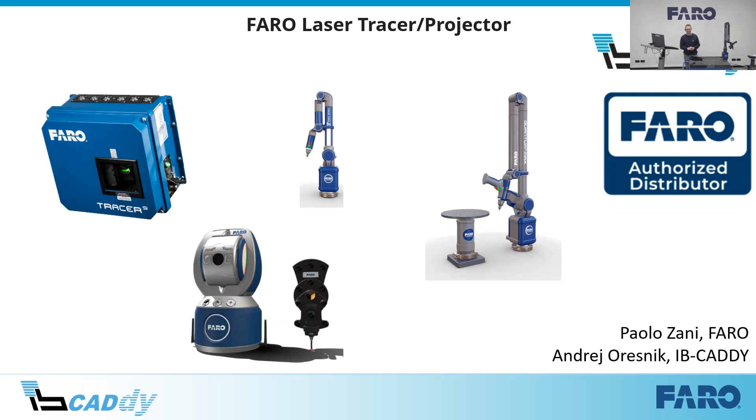I will make a short presentation about our company and our solutions in the field of FARO supplier. IB-CADDY company was started in 1991. We have three locations, two in Slovenia, in Ljubljana and Kamnik, and one office in Belgrade. Our company has a lot of knowledge in different fields of industry, like mechanical design, electrical design, manufacturing, and so on.

We have more solutions for what we can offer in our market with SolidWorks and all connected software to SolidWorks and 3D experience, like CAM, Solid Steel, and so on.

We also have different technologies in 3D printers, so we can print with different materials like carbon fiber, Kevlar, some metal parts, and so on. But today we will speak a little bit more about the FARO solution.

We are authorized reseller for FARO solutions in Slovenia, Croatia, Bosnia and Herzegovina, Serbia, Montenegro, and North Macedonia. FARO is divided into different fields, like 3D manufacturing, metrology, 3D design, reverse engineering, construction, BIM, and also public safety and forensics.

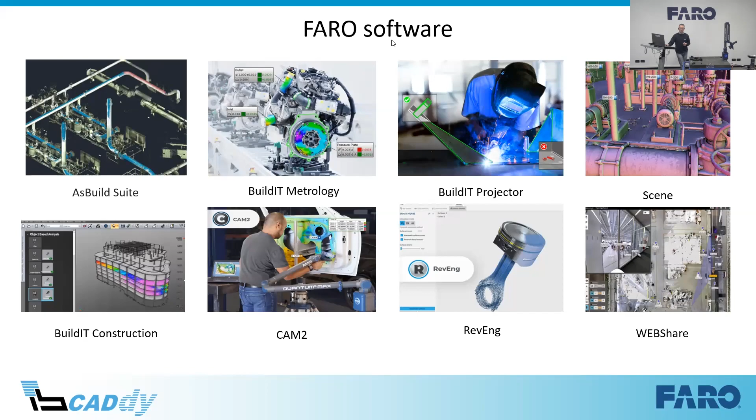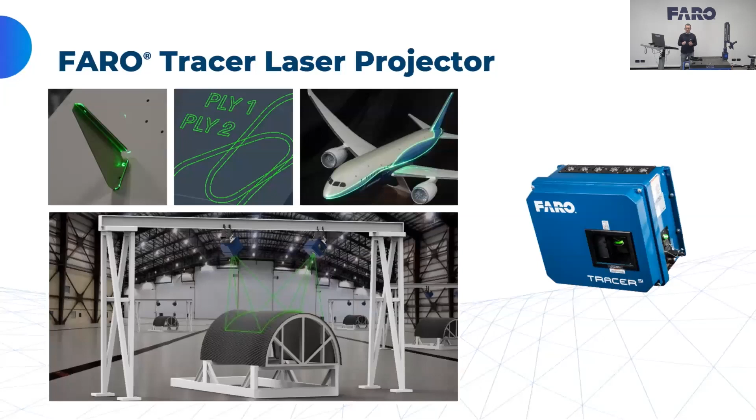FARO Tracer projector is a laser projector, really flexible. As you can see in this slide, we can project on mechanical parts, assemblies, ply stratification for carbon fiber or composite applications, and really wide projection on really big objects like an aircraft or a satellite part like this one.

How does it work? What is the FARO Tracer and how does it work? First of all, it is a beam laser projector. Thanks to two turning mirrors, it is able to spread a three-dimensional laser image on the surface of your part, in order to project sequences, locate parts, and find positions, aligning parts, sub-assemblies, and models.

Last but not least, the FARO Tracer SI is able to scan your part and, without any operator intervention, determine if it's okay, in the correct position, missing, or not missing.

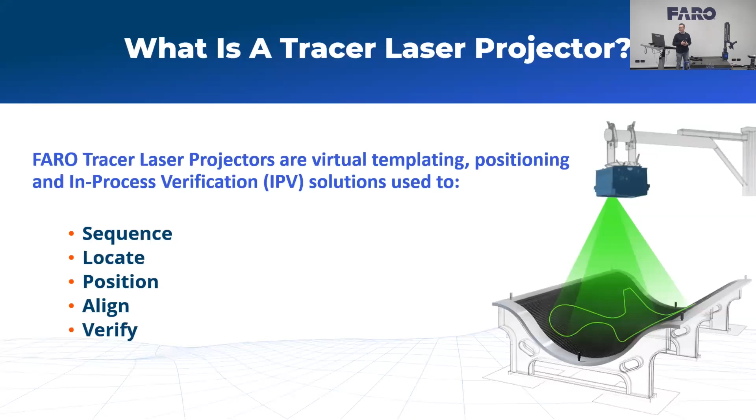The benefits: first of all, improve the quality. Imagine that right now you have different physical templates, which could be wide or small, but the common point of all physical templates is that the company is spending money to manage them, to take care of them, and to calibrate them.

With a virtual template, you are able to increase quality because you can adjust the projection according to your projects, and you save money because you can scrap all your old physical templates. This way, we can reduce scrap connected to human errors or assembly problems, and cut that dramatically. We can cut the rework time. In a few words, this solution is able to reduce costs and optimize labor costs.

Usually, when we are talking about manual processing of a workflow or an assembly, there is usually a problem.

Really high level and skilled operators are facing an overload, while new hired operators are not used so much. With the correct workflow and guiding correctly the different operators, we are able to guide all operators in the same way. This means uniform production and balancing the workload on different operators.

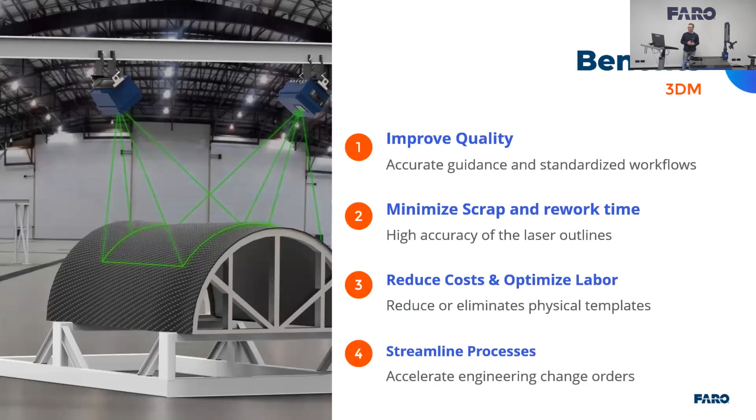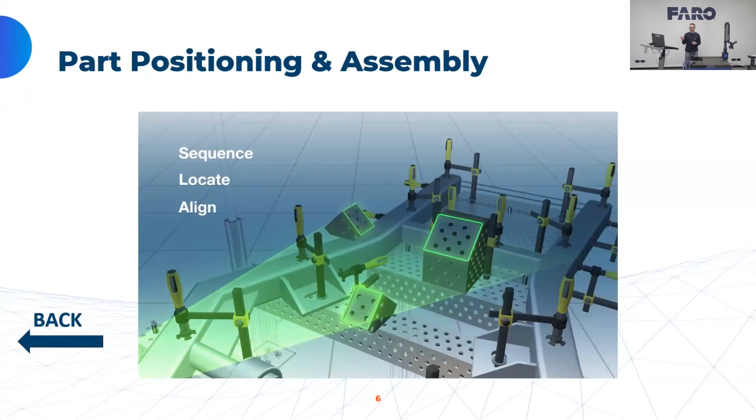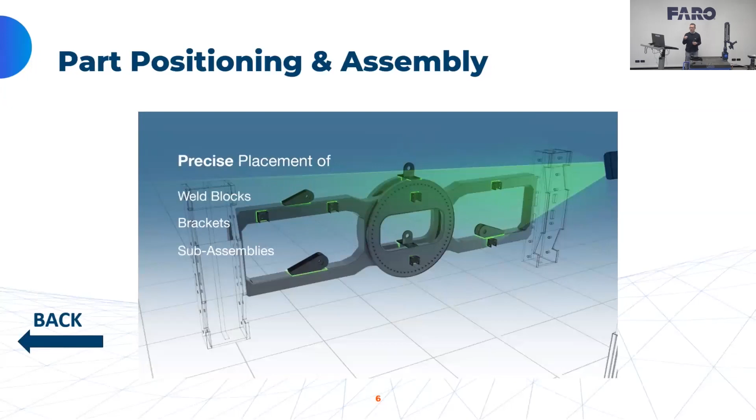Let's take a look at some examples. Here we have a video showing the assembly of a frame. This is a heavy equipment part. Another heavy equipment part, where I'm projecting the placeholders for the different parts to mount and weld.

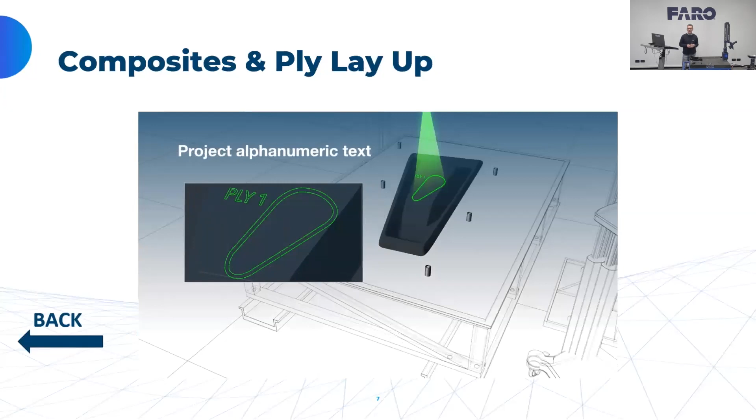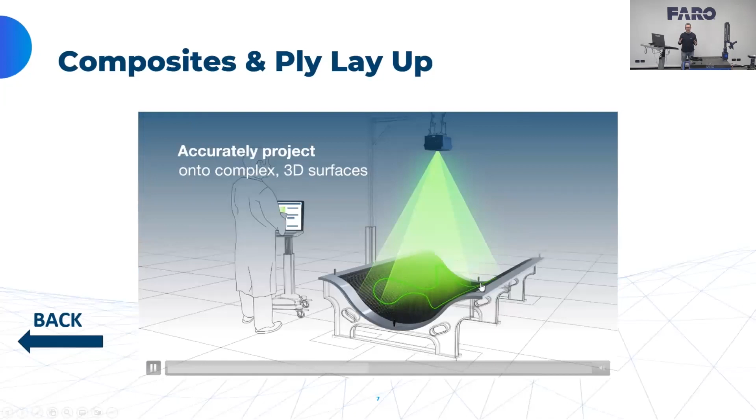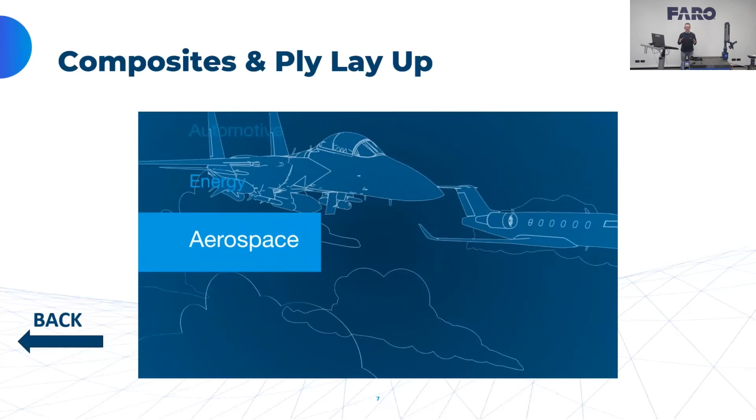The FARO Tracer is also a good idea if you want to create the virtual template for carbon fiber stratification and composite industry. Usually one of the problems is finding the correct location of the mold. The tracer can find this location and adjust it in function of the movement of the operator, and is able to check it automatically in order to always have the correct position of the mold.

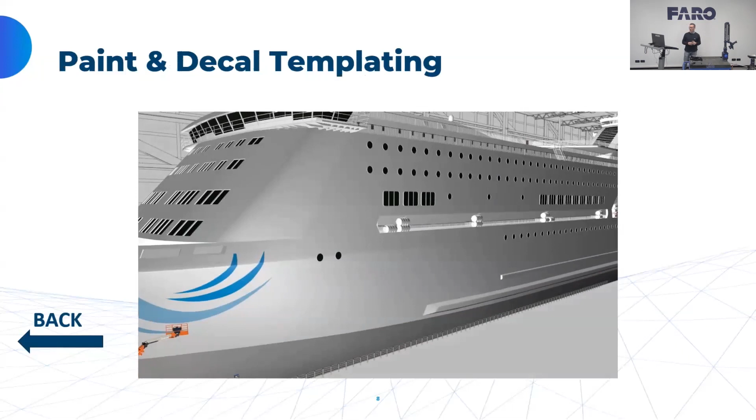When the object is really wide, like an aircraft, a cruise ship, or a commercial ship, we are able to connect different tracers and create an array of tracers in order to project really wide. Everything is synchronized, so in the exact position where the projection of the first tracer finishes, the projection of the second tracer starts.

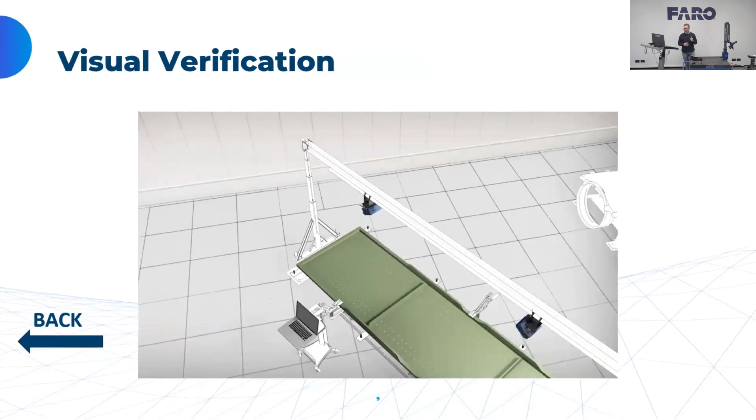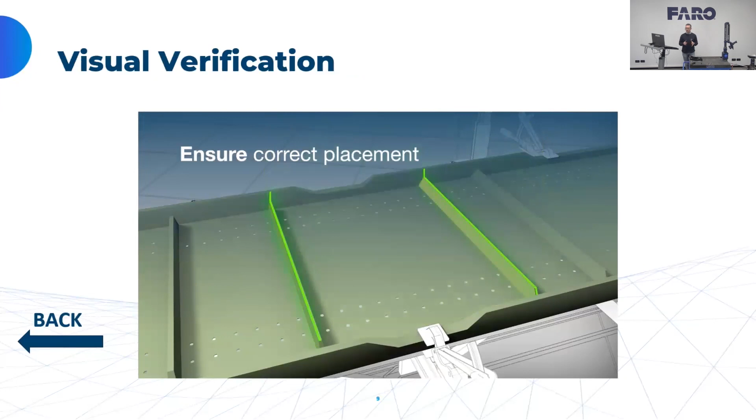And last but not least, the possibility to guide the operator in order to check visually the position. But remember that Tracer SI is able to scan and finally say if, for example, these holes are in the correct position or not.

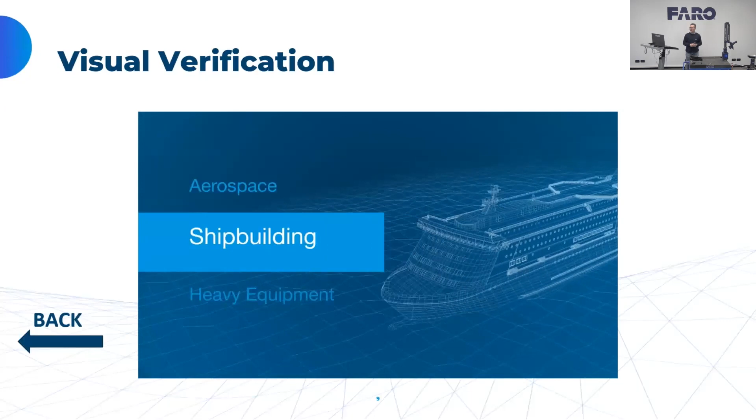About the specifications, the range of projection starts from 2 meters up to 15 meters, so we are really flexible. You can always find a position where the tracer is projecting. It is a device with high accuracy - we are talking about 0.25 millimeters at a distance of projection of 4.5 to 4.6 meters.

Is it complicated to find the position of the mold, the position of the assembly? No, it's not rocket science. There are some reflectors, and the Tracer M is able to scan these reflectors and find the correct position.

The virtual templating is based on a 3D CAD model. This means it's enough to load your CAD, click what you want to project, and the tracer will start projecting. The only difference between Tracer SI and Tracer M is the possibility to scan. Thanks to this, Tracer SI is able to scan holes, scan corners of your models, scan checkerboards in your environment, and align without reflectors.

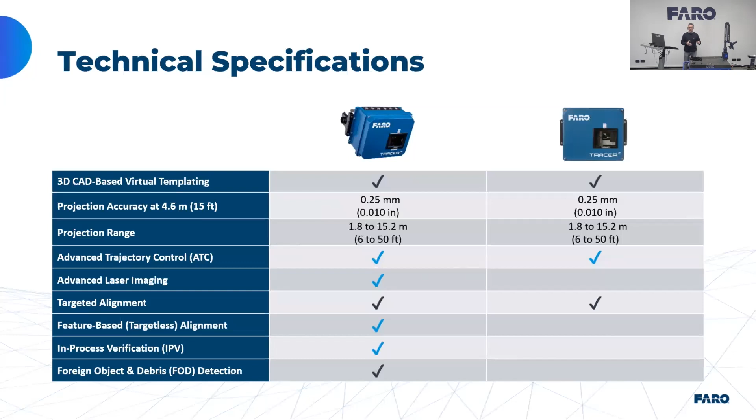And thanks to the capability of scanning, the Tracer SI is able to check if a component is in the correct position or not, independently from the operator.

How to fit the tracer in my environment? We have different possibilities. First of all, the tracer is equipped to provide the power supply - it's enough to provide a cable like this one, a standard cable common in desktops, computers and laptops, and an Ethernet cable. We are not talking about gigabit Ethernet, we are talking about fast Ethernet. So two requirements that are not so hard to provide.

When we have to mount the tracer directly on a column or a beam, we can provide this frame - it's called the 3-axis mount, and it's possible to mount this equipment directly on a pole, a cylinder of 100 millimeters of diameter.

In case you want to mount the tracer directly on the ceiling of your facility, there's the beam mount. Thanks to the beam mount, you can mount your tracer directly on a ceiling and orientate it manually. If you want to create your own mounting system, it's not a problem - we are the manufacturer of this technology, so we can provide the different positions of the holes in order to fit perfectly this device with the design of your facility.

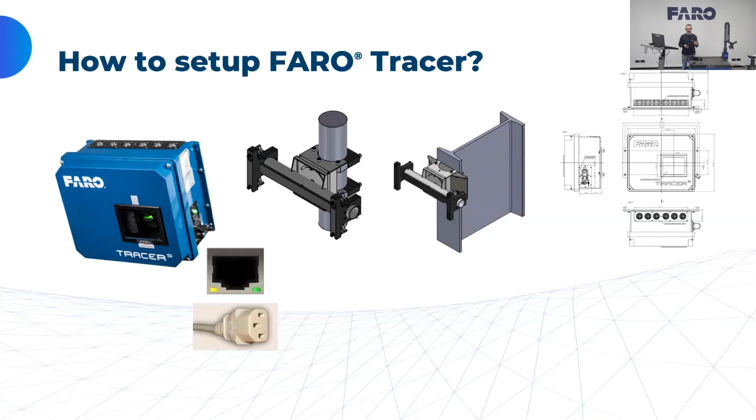The FARO Tracer is quite passive, it's projecting nothing else. What is the clever side of this solution? The clever side of this solution is the software.

This software is available with 3 different interfaces: Planner, the most complete interface for the operator and planner who should physically create the different programs; Instant Projection; and Operator. Operator is the typical user of the tracer, who thanks to a remote control, is able to control the tracer without any computer or keyboard close to them.

It's enough a remote control for moving the projection. But there are small companies where the planner is at the same time the operator. In this case, we can use instant projection, which is an interface optimized for pick with the mouse and project with the projector.

All these three interfaces are really simple to use. It's possible to do in-process verification, asking the operator to check if the position is okay, or asking the tracer to scan and verify if the position is okay. I can provide different levels of instructions, starting from the projection of the text directly on the surface of the part, and finishing with on-screen instruction using text and images.

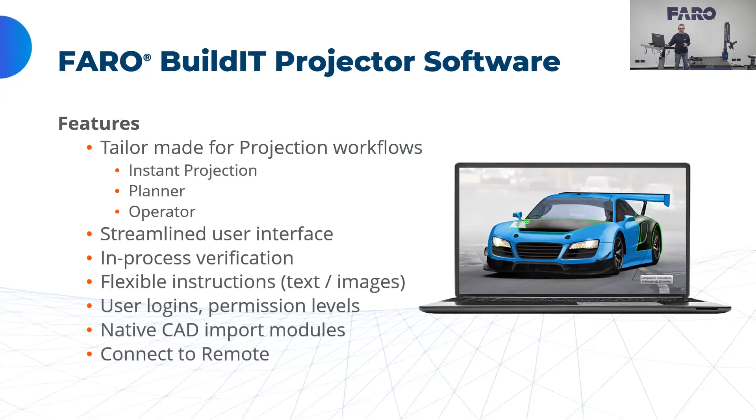Okay, let's go on and take a look at the FARO Tracer. Now I block my camera in Spotlight. If you have some questions, please feel free to ask, there is the chat for this.

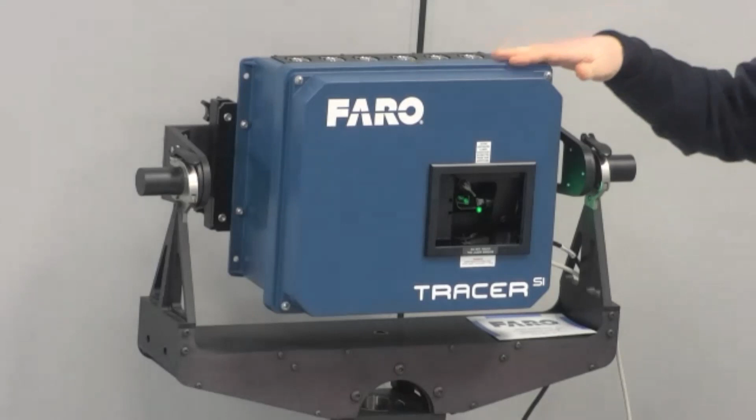Okay, this is the tracer. As you can see, it's a really regular shape, 40 centimeters long, the depth is roughly 20 centimeters, and 30 centimeters high. Here we can see the yoke mount, a system for mounting this projector directly on a standard tripod, a FARO standard tripod.

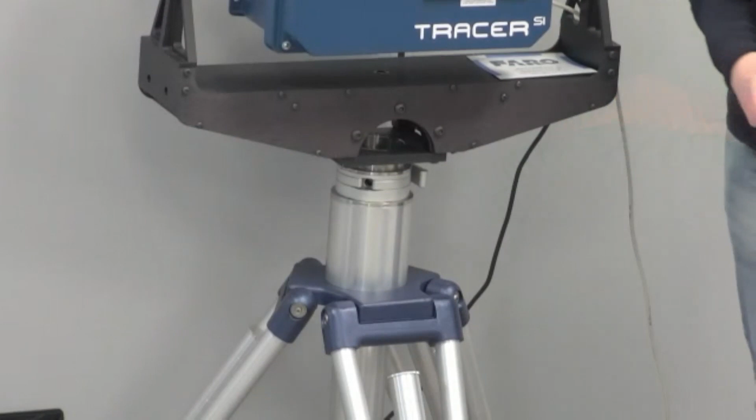In order to connect the power source and the Ethernet, can you see that here there are two cables? One is the Ethernet, the other one is the power plug. This equipment is protected against dust with sealing. Here there is a protection glass that is protecting the laser, an array of fans that is extracting the heat from the inside, and here a filter for protecting the whole equipment from the dust.

And here, as you can see, it's possible to orientate the laser projection in two directions thanks to this yoke mount. What is projecting in this moment the FARO Tracer? As you can see, it's projecting here.

Okay, I'm on the other side of the room. Here, as you can see, the tracer is projecting. What is the clever part that is projecting? The software. Now I'm going to share with you directly the software projection.

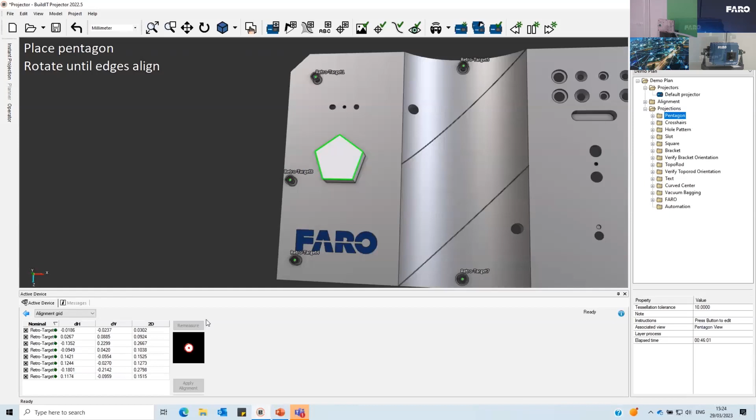I share with you again my screen. Now I recommend you use a view option and use split view in order to see my software on the left side of the presentation and my camera on the right side. Okay, let's imagine that I'm the operator.

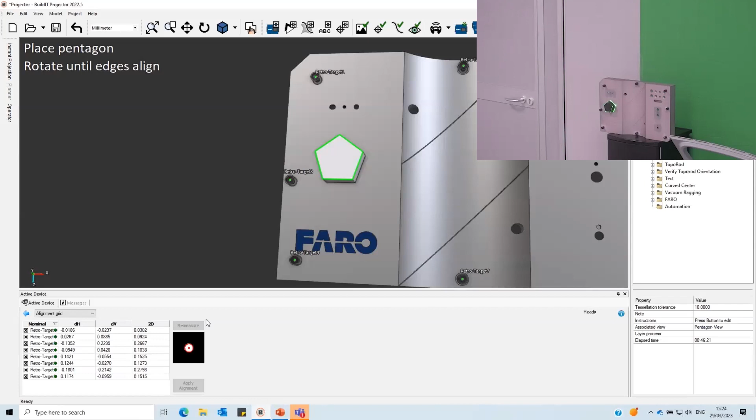In this moment, can you see that my software is projecting a pentagon, and there is the note: rotate the pentagon until the edges are correct. Can you see that this is the projection? And can you see that the projection is really precise, 0.25 millimeters of accuracy?

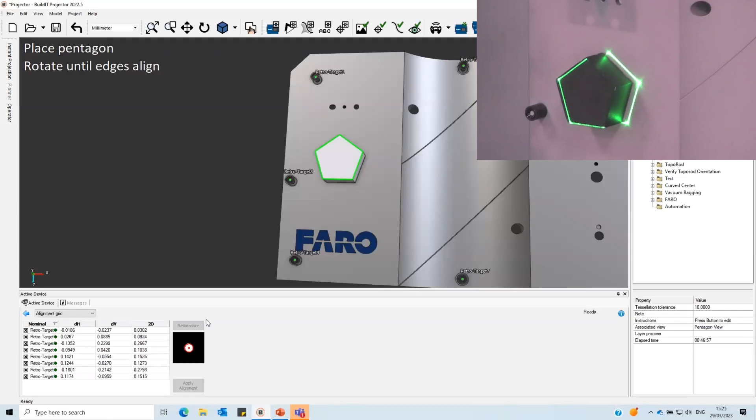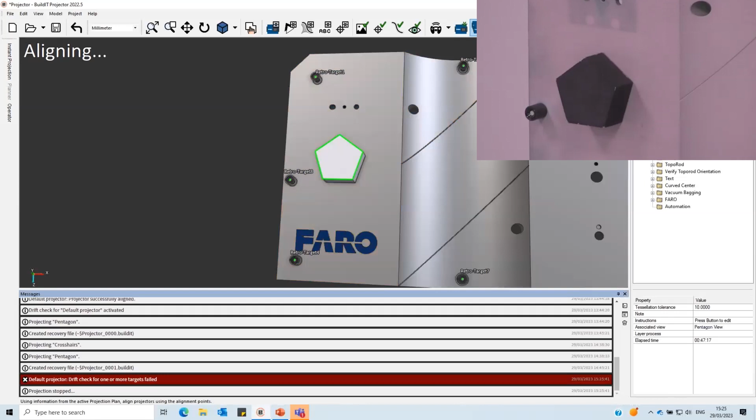If I need to move my part, can you see that if I move the part a bit, now the projection is not aligned. But just a click with the mouse or with the remote control, and I can perform the drift check. Now the software is aligning again all the points, the reference points, and is starting projecting again. A few seconds for detecting the different targets, and finally the software will start projecting again.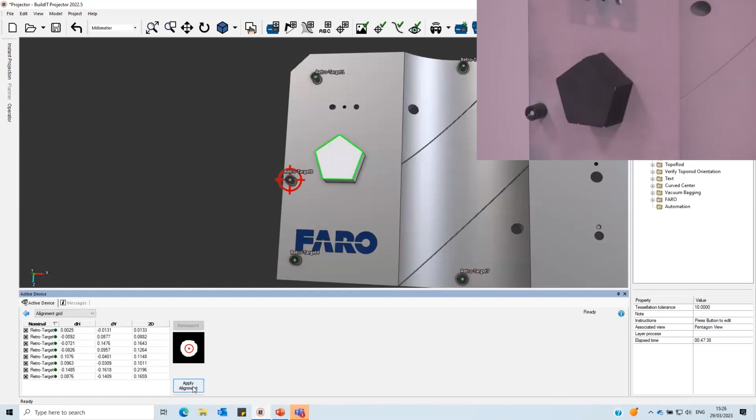Here we can see the alignment. The alignment could be automatic or manual. And can you see that I moved my part, but the tracer is able to find this position again.

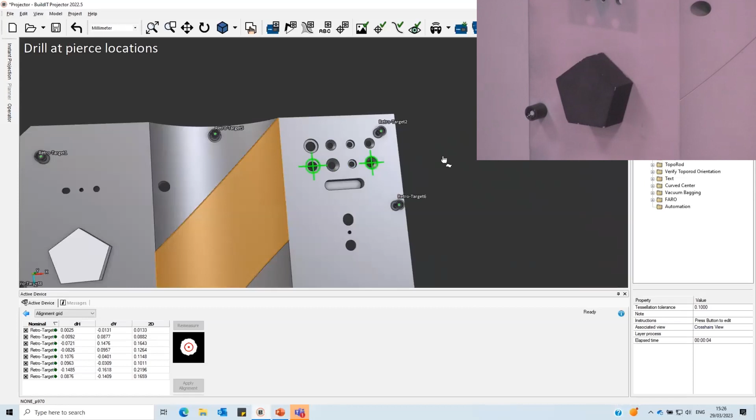Okay, let's go on. Clicking the button of the mouse here, I can advance with one step. Now the software is projecting two placeholders for drill holes. Going on, always with the mouse, I can check these holes, so I can ask the operator to check these holes and say if the hole is correct. I can project different holes at the same time, or different features at the same time, but of course I can enter my tree of features and go on and check one by one all the features.

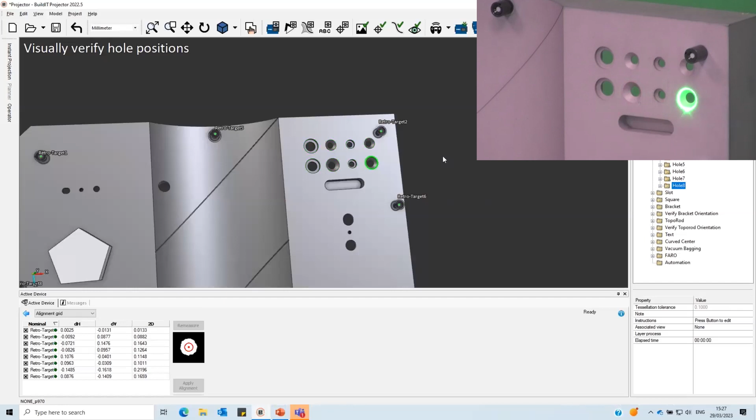One of the typical problems of the laser is the possibility to project on reflective materials or completely black materials. In this case, I'm using a carbon fiber part. Can you see that the projection on completely black parts or really reflective parts is possible.

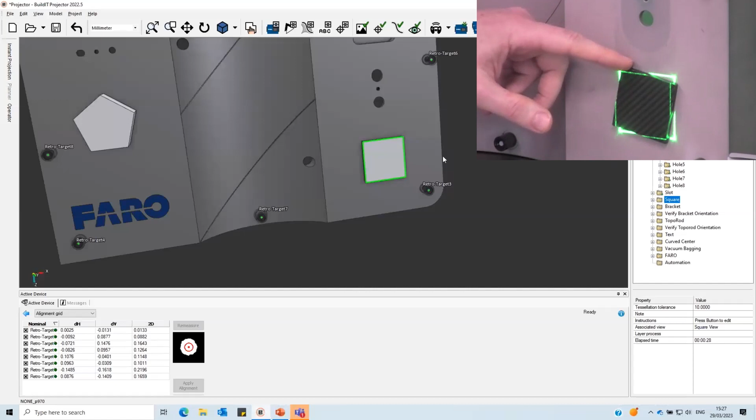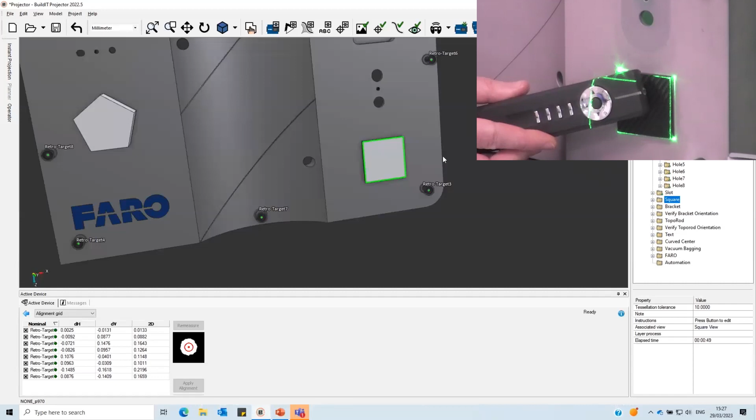So it's possible to project on really shining stainless steel parts. It's possible to project on glass, and you see that the projection is visible also on the glass. And it's possible to project on shining parts, and you see that the position is visible also on this really shining button.

Going on, now I want to project a part here. Okay, this part could be mounted by the operator in the correct position or upside down.

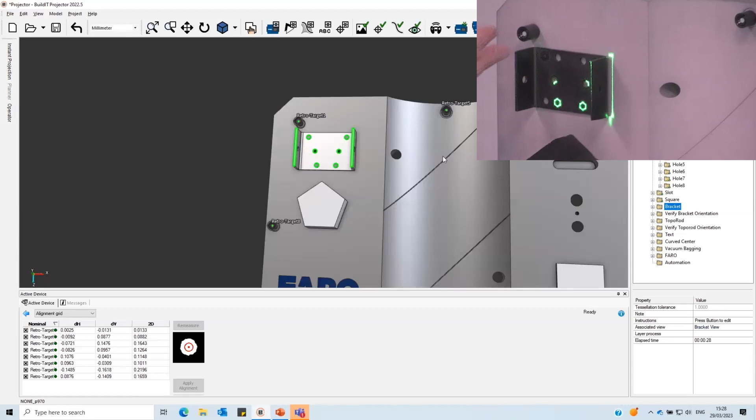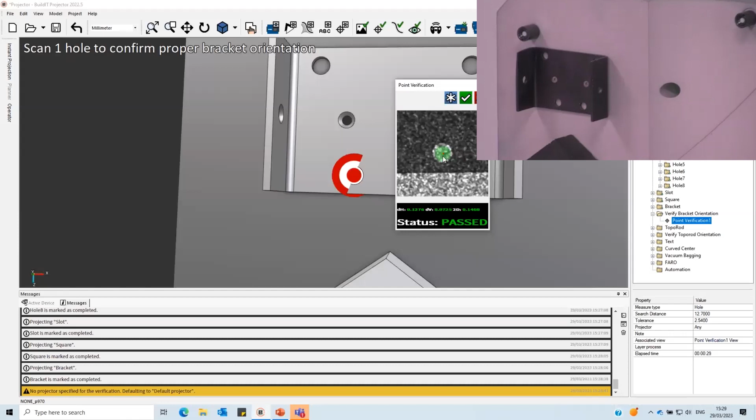With tracer M, I can ask the operator to please check carefully if the position is correct or not. With tracer SI, it's clever. I can go on, highlight a specific position, for example this hole, press button number 3 of my remote, scan my part, and can you see that in this moment the hole is not in the correct position, failed. So I move upside down my model, press again my button, and now it's in the correct position. So now I can confirm my operation.

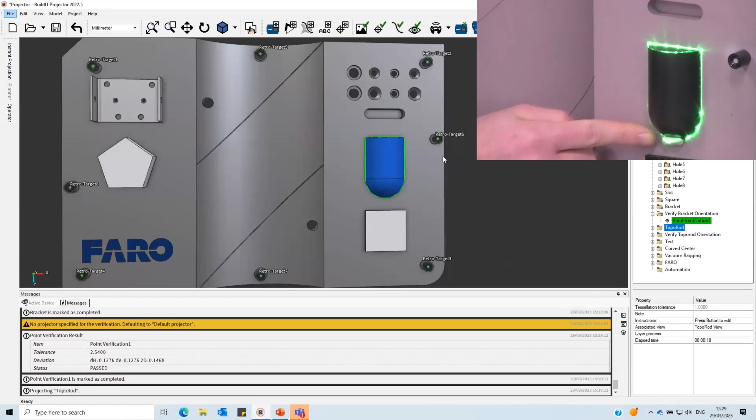Sometimes when I'm welding, when I'm gluing something, it's possible that I have something unwanted here. This is an FOD, an object that I don't want on my surface. The tracer is able to detect this object too.

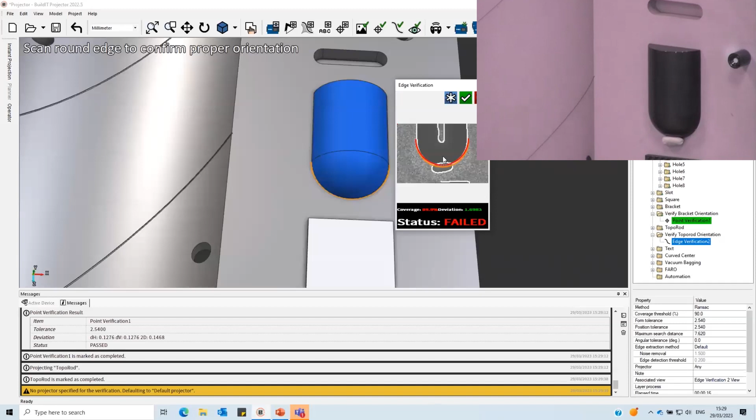Using the tracer SI, can you see that I'm able to detect if the profile is in the correct position and if there is something strange on my surface. I can confirm. Can you see that now the verification is failed and the step of the verification is completely red?

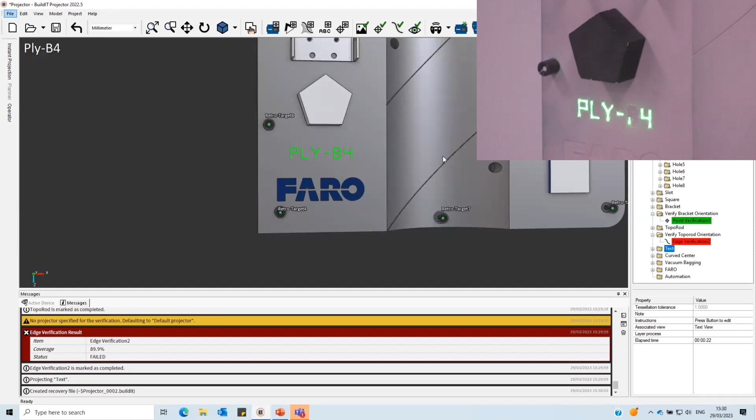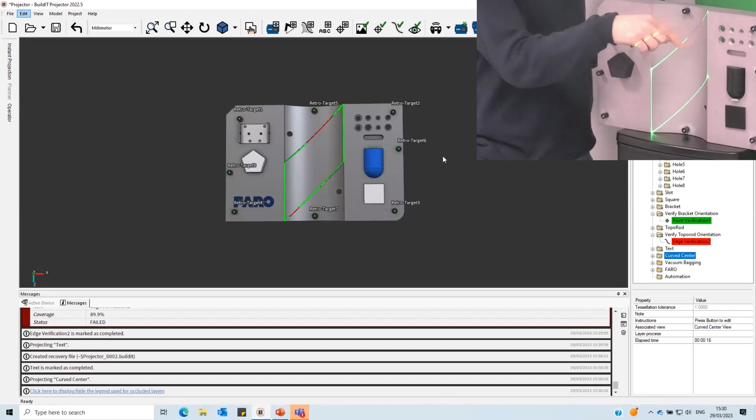I can project also here a text. Can you see that here there is a text? And it's possible to project the part number or the ply number directly on the surface. In this moment, we are projecting only 2D features, but this one is a three-dimensional feature. We are talking about a cylinder, so it's a three-dimensional shape projected directly on your three-dimensional surface in the space.

When the text is really long and the operator should read all the text, different instructions are not comfortable with laser projection. So what we can do, we can project directly on the screen in overlay with the software. We can provide the different instructions.

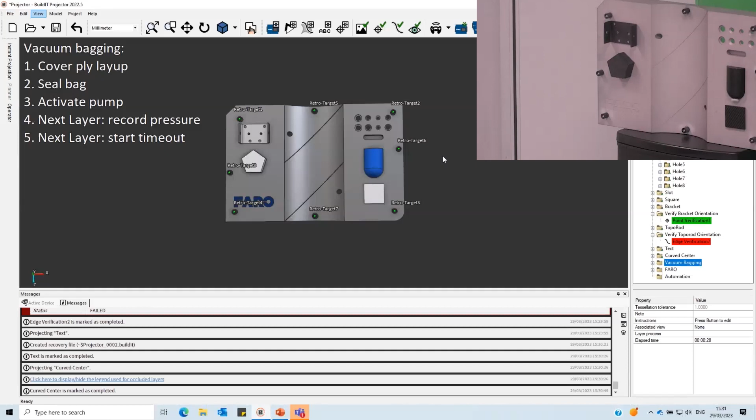Talking about making the operator's job easier, there is the possibility to collect notes, so no paper anymore in your line of production.

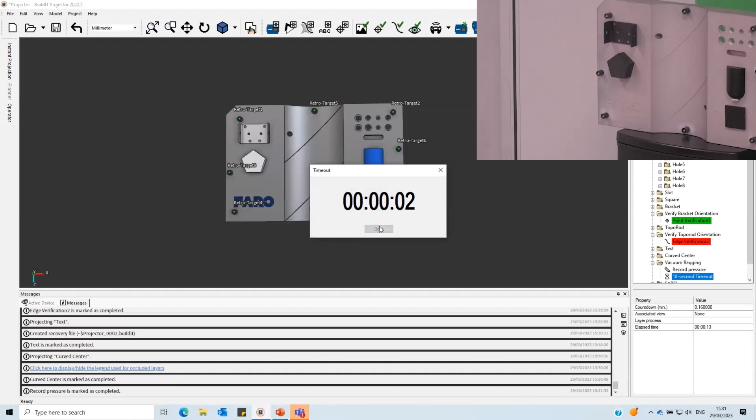If we are using glue, it's possible also to start a counter. In this moment, my interface is Planner, not blocked, but if I enter with the operator interface, the operator interface is perfectly blocked until the timeout arrived to 0. Okay, now you can close.

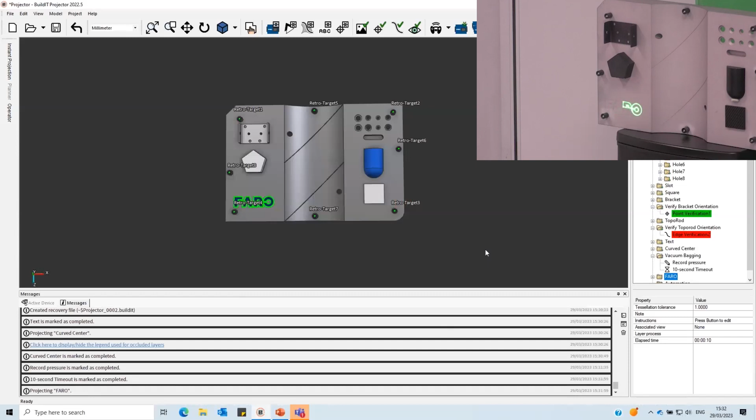Here in projecting a DXF, I told you it's possible to import three-dimensional files, but it's possible also to project 2D files like this one. This is the FARO logo, a DXF imported directly and projected on this surface.

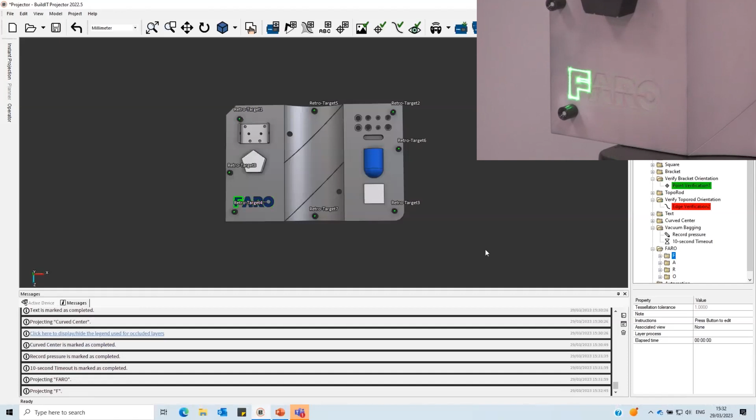Now you can see a flickering, and probably during the whole presentation you were able to see a flickering. This flickering is not natural, it's my camera that is not synchronized with the laser. There is always a limit. It's possible that the flickering could be visible also for human eyes. In this case, I can project partially my shape. When I project partially, the flickering disappears both for the camera and human eyes.

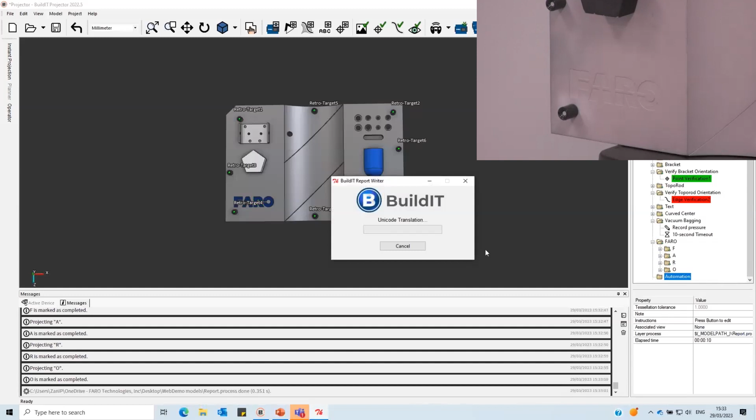When I finish my workflow, it's possible to run a layer of automation. BuildIT Projector is able to support native language, so native BuildIT API languages or commands, or is able to support Python. Python means the possibility to dialogue directly with PLC, with robots, with automatic implants.

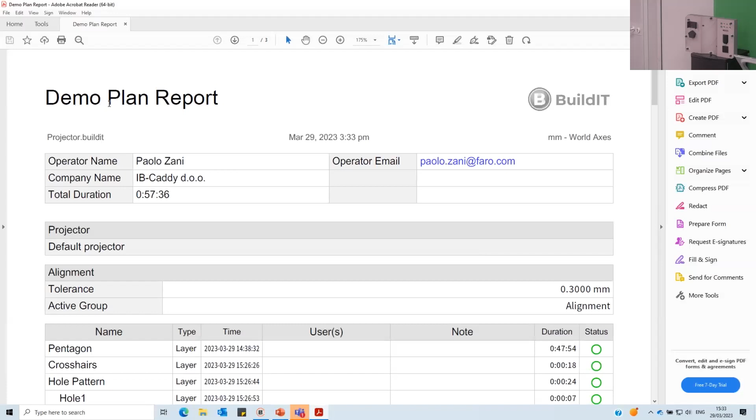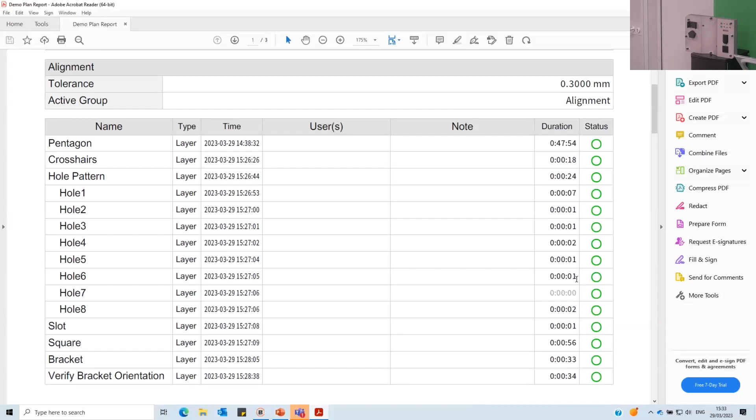And here you can see a demo report. So demo plan report with the name, it's fully customizable, this part. The projector, the tolerance of alignment, and here all the steps. When you see a green ring, green circle, the operation is passed without any problem. When you read red circles, like in this case, the operation is failed and the step of mounting and assembly is failed.

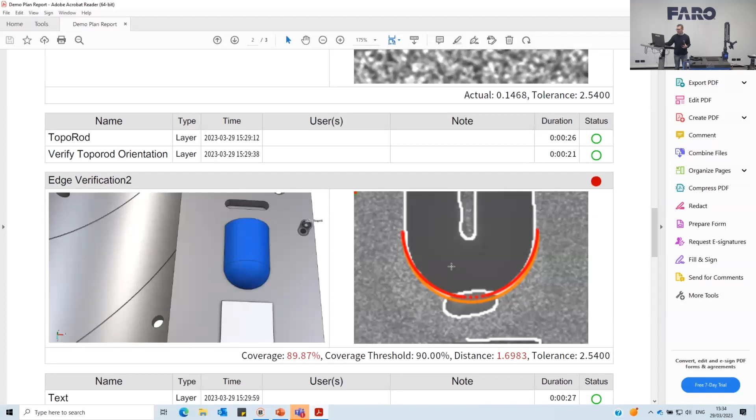And here you can see all the steps with possible notes for the R&D or the quality management. When a step is in gray, this means that in this case the operator skipped this specific step.

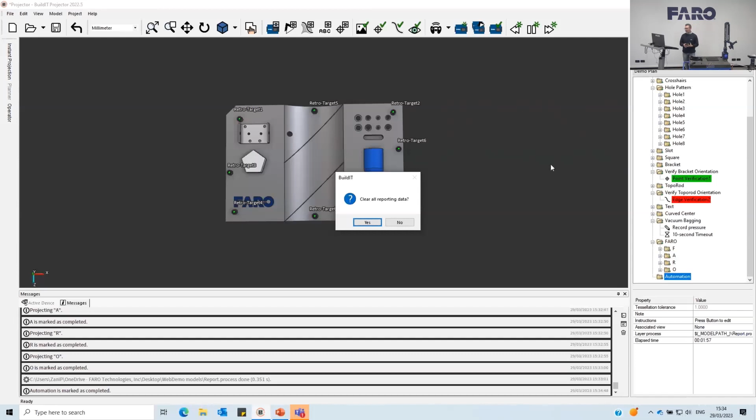When I go on with my remote, can you see that the software is at the end? So the software could ask the operator, do you want to clean everything and start again? If I say yes, can you see that I start again with a new projection? So I'm ready for mounting another part and starting another assembly.

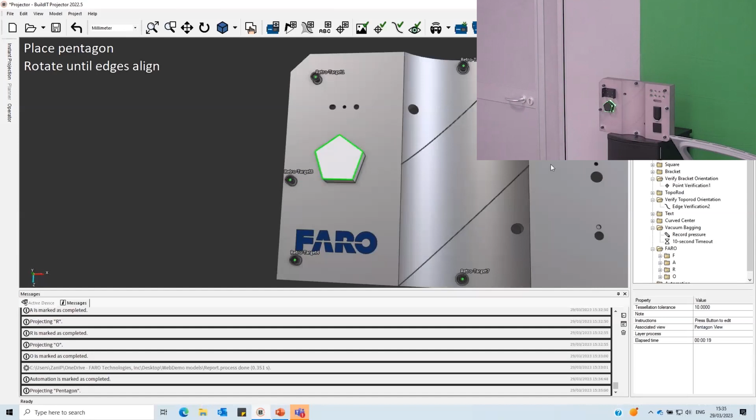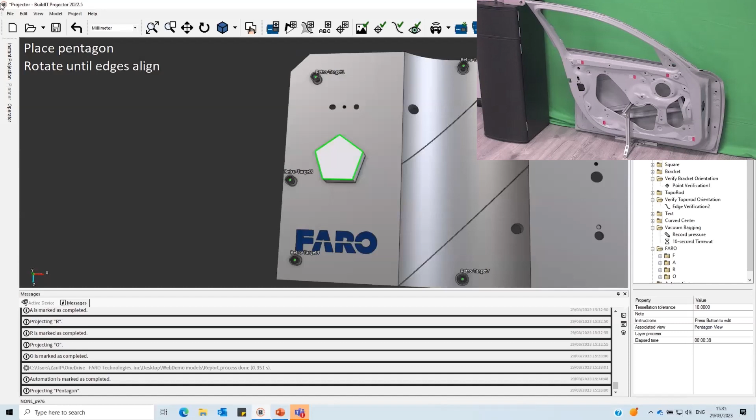This is a quite simple part. Let's take a look at something that is a bit more complicated, like a car door, like this one. Can you see that I equipped my car door with these stickers? These stickers are reflectors, and the tracer is able to align automatically with these reflectors. I can show you. I close this project, so it's enough to open another project.

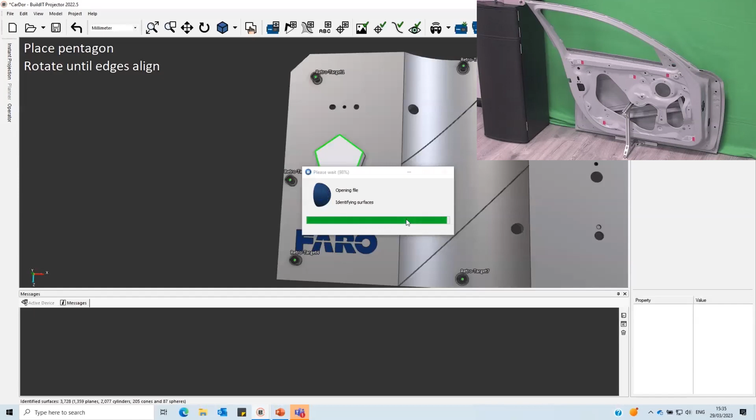I'm opening this file in this moment. This file was made in Unigraphics, so NX. Can you see that the software remembers automatically the last position of the tracer?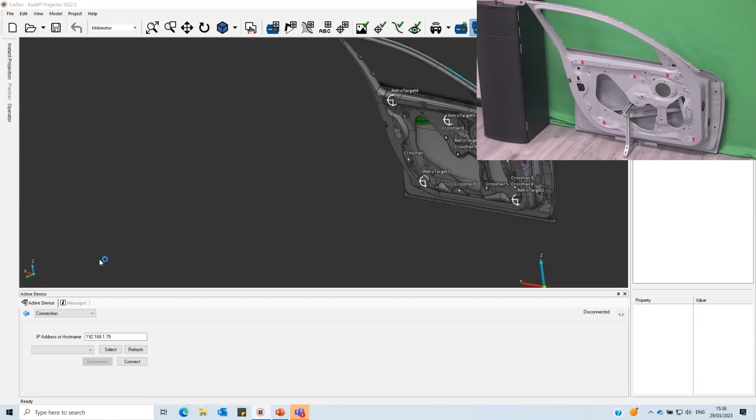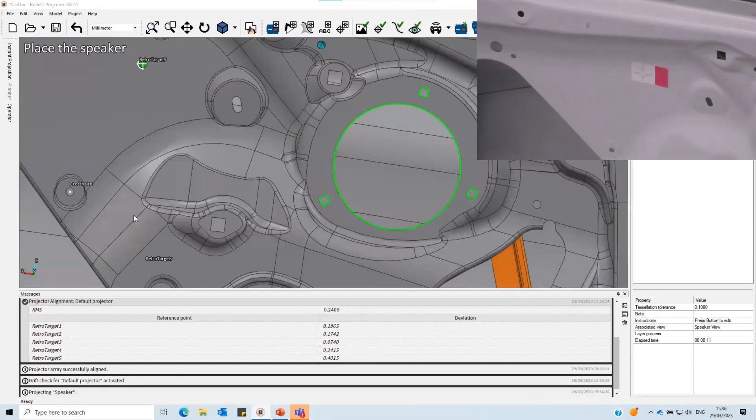Now I click Align Projection. When I click Align Projection, the software usually is able to scan automatically the area if the scan line is turned on. Can you see that in this moment it is aligning and already projecting this area? If I zoom in, there is the instruction for mounting the speaker. This is the projection.

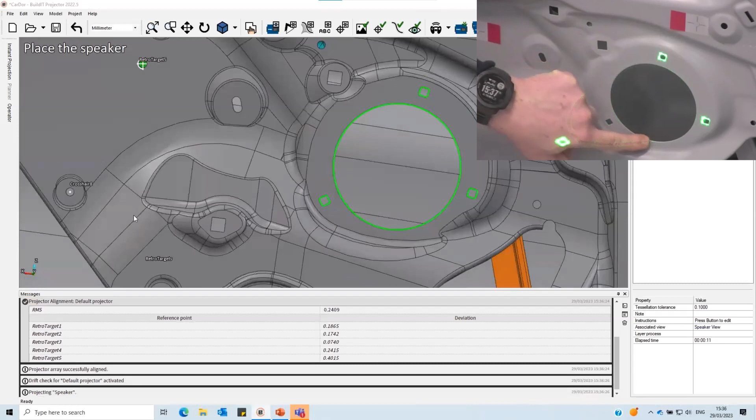So if I'm an operator, I'm aware that in this moment I can mount my speaker in this door, in this area, and I'm aware if something is not going the correct way. In this case, this hole is a bit moved in this direction, because you can see here that the edge is complete, and here it's not complete. So I'm aware that there is a possible problem of position here.

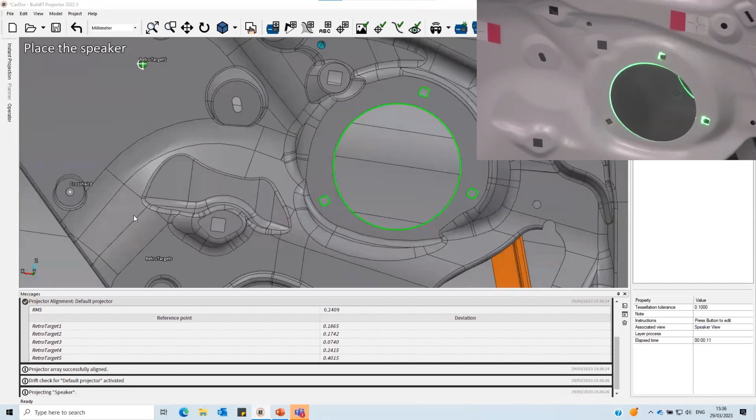Going on, always with the remote control - it's not the only way to control the laser, but it's usually the way that different operators prefer. I click button number 1... sorry, there's a message in front. Can you see that automatically the software switches from the mounting step of the speaker here to the mounting step of the mirror here?

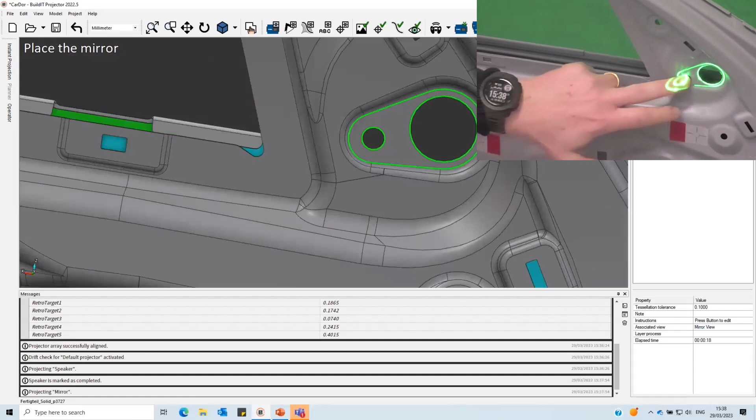Here the position of this part is perfect, perfectly fitting this position. I can zoom in a bit more to show you that the positioning is perfect.

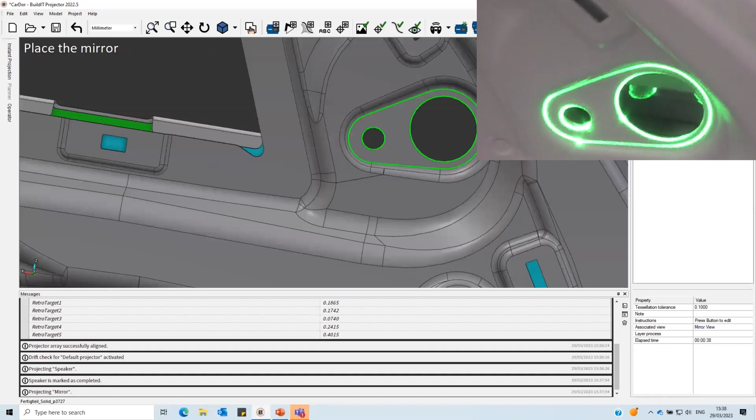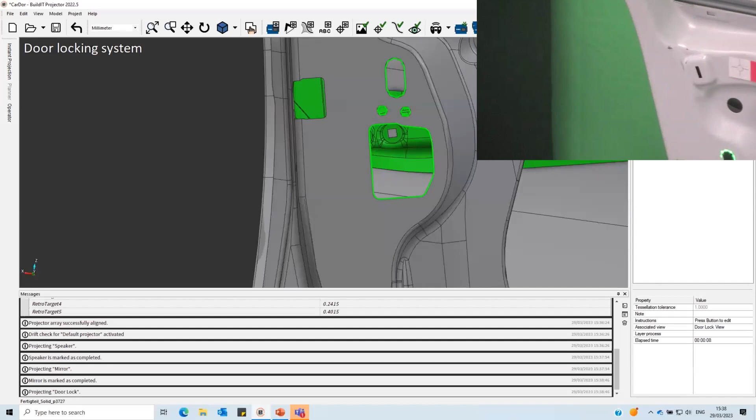The next step is the positioning of the locking system of the door, and now I'm projecting this in this area, with instructions on the screen.

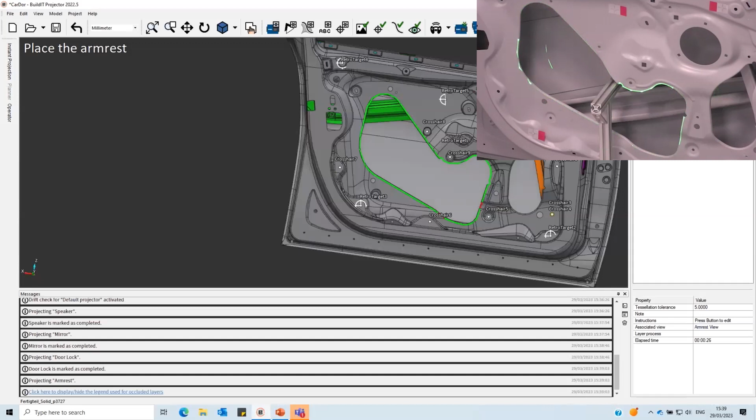Going on, I can project a three-dimensional layer here. Can you see that I'm projecting this line? I can check if my profile is perfect, and I'm checking if I can mount the armrest. This is the slot for the armrest.

Going on, I can highlight the positions of the different screws or fasteners in order to block my part here - the coverage of this door using these fasteners or this blocking system, these holes.

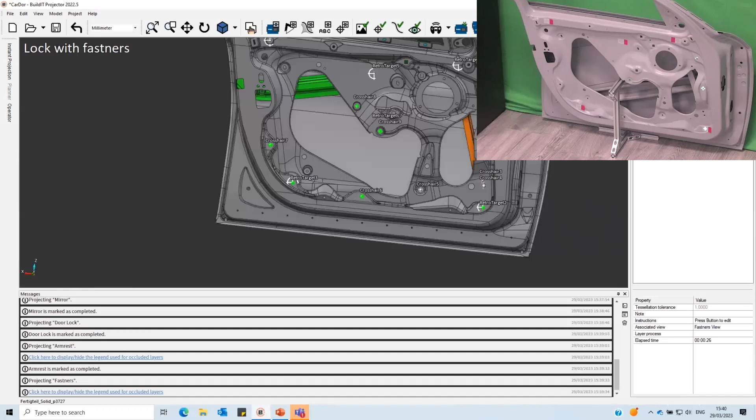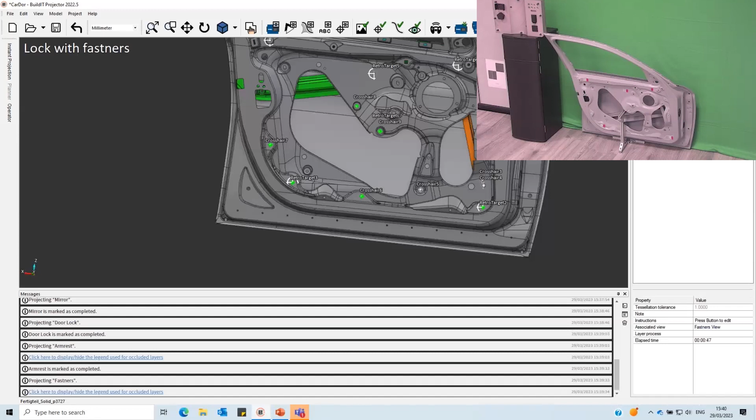This is another example of the flexibility of this solution. Can you see that I jumped in a few seconds from one projection here to another projection here? I completely changed my setup and I'm projecting two different projects. Is it complicated to create a program?

It's not complicated. For example, I want to project this physical surface here. It's enough to add a new layer to the projection, select what I want to project from the layer, for example this, and can you see that the projection is instantly ready? So I can instantly check if my surface is correct or not.

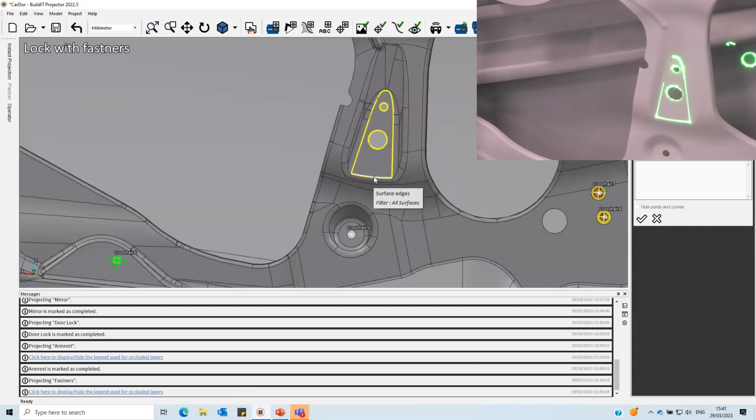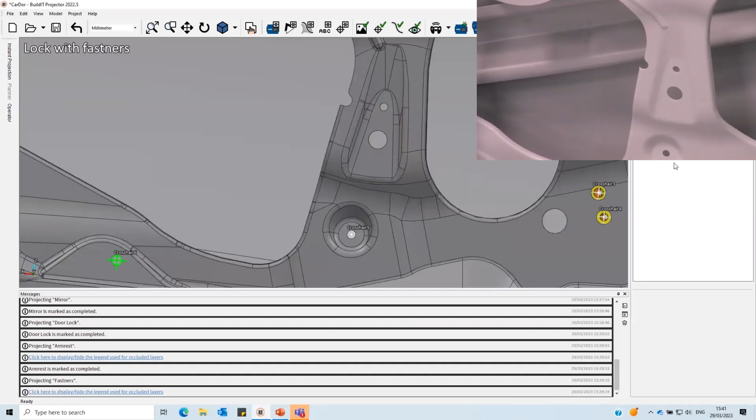And of course, if my project is dynamically changing during the time and I want to adjust this - for example, my customer is asking, 'I don't want the two holes anymore' - no problem. I create another layer with only this slot, and can you see that the two holes disappear automatically? In this way, I can create really flexible instructions, really flexible steps of my assembly, and adjust my program in function of the workflow that is changing during the time.

And the operator is always aware and always guided during the workflow. So I can completely eliminate all the problems connected to 'I was not aware that this step of the workflow was added or eliminated completely,' because you are always guided.

It's also possible in the same projection program to create different plans of projection. For example, for this door, I can project the front with projection plan number 1, flip my door, load projection plan number 2, align on different reference points, and start projecting the back.

One of the solutions when I have really wide parts is to project with different tracers, but there is also the possibility to move the tracer to different positions, or move the part to different positions, and project the different parts of my model separately.

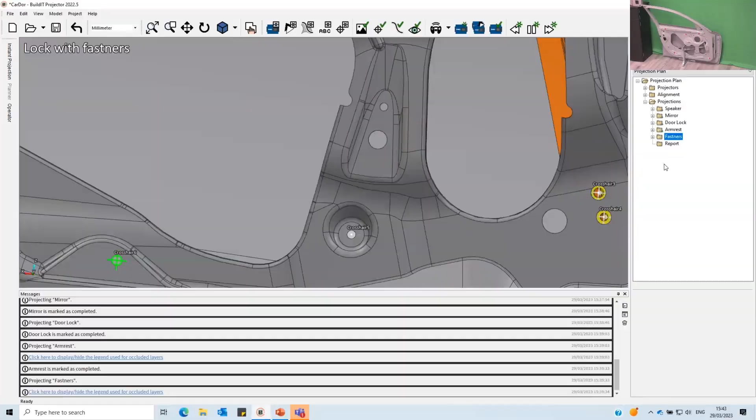With this last example, I finish this really short presentation. I'll stop sharing my screen and return back to my standard mode. I'm available for technical questions, and I leave the floor to Andrei.